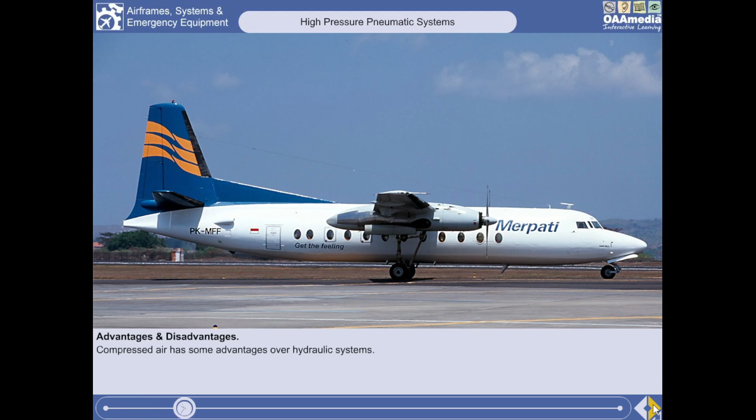Compressed air has some advantages over hydraulic systems. Air is universally available and it is free. The system is lighter because the air can be dumped overboard after use, so no return lines are required, and air is lighter than hydraulic fluid.

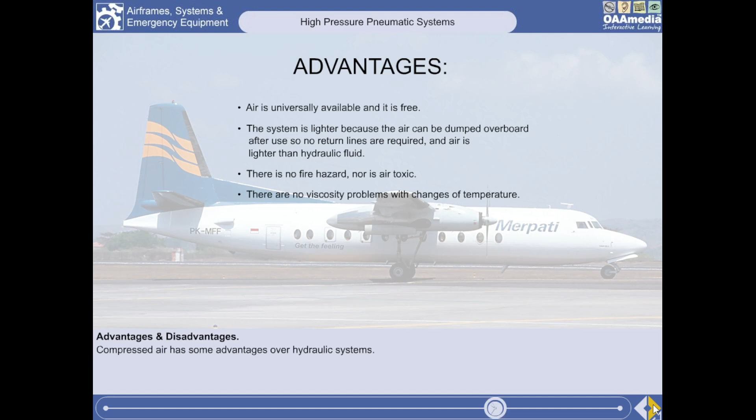There is no fire hazard, nor is air toxic. There are no viscosity problems with changes of temperature. The major disadvantage of air is that air is extremely compressible.

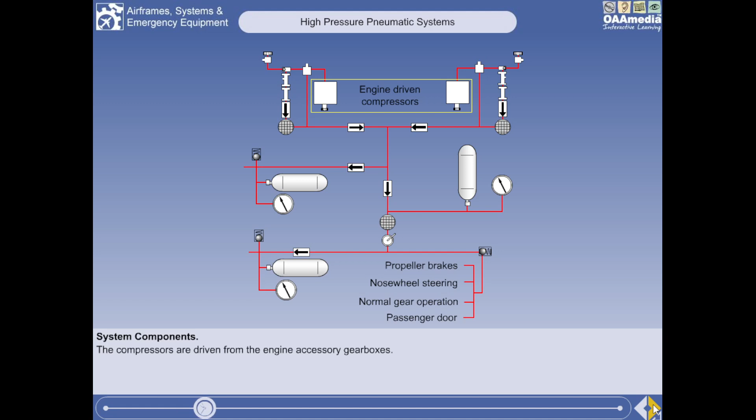The diagram shown depicts the high-pressure, closed-center system used on the Fokker F-27. The two four-stage compressors are driven from the accessory gearboxes of the turboprop engines. The unloading valve ensures that the system pressure is maintained at 3,300 psi by dumping excess air overboard.

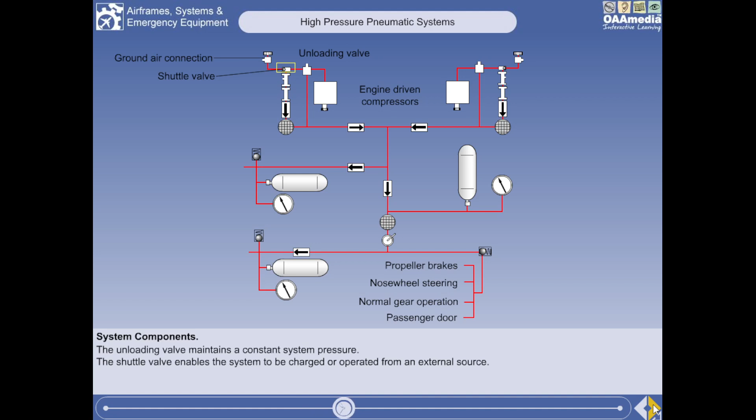A shuttle valve enables the system to be charged or operated from an external source. Two components provide protection against the possibility of water freezing in the system: a moisture separator, which removes 98% of the water present in the air, and a dryer, which removes the remaining water using a desiccant such as silica gel or anhydrous aluminium silicate.

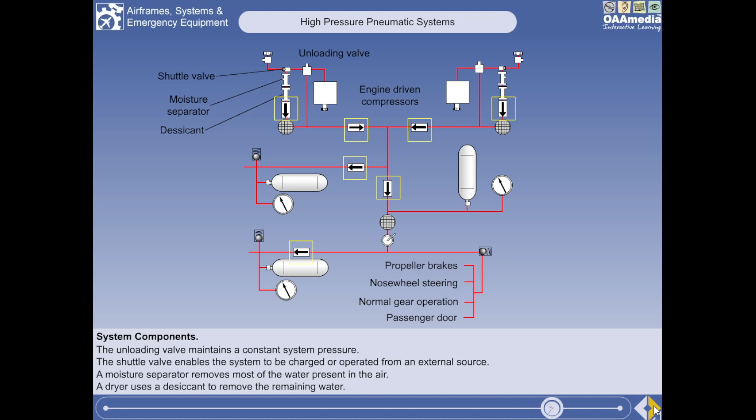There are a number of non-return valves in the system to prevent reverse flow of the air. Filters ensure that the air is clean before it enters the system. Three air bottles, which serve as both reservoirs and accumulators, are provided to store the high-pressure air ready for instant use.

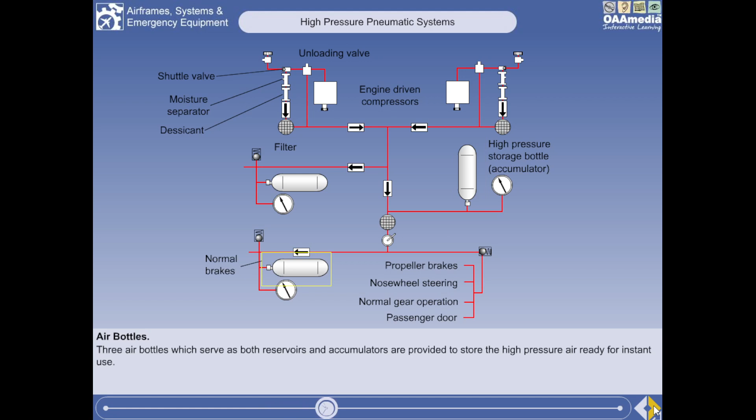The main system has a large capacity bottle. There are two smaller bottles, one for the brakes and one reserved for emergency gear lowering. Most of the components operate with a pressure of 1000 psi, so the air is passed through a reducing valve before being used by the various services. There is a manually operated isolation valve which can be closed to facilitate system servicing.

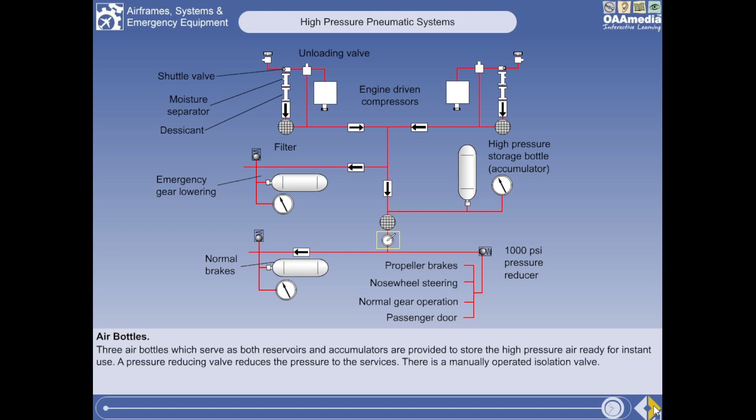That is the end of the high-pressure pneumatic system lesson. You should now know the advantages and the major disadvantage of such a system.